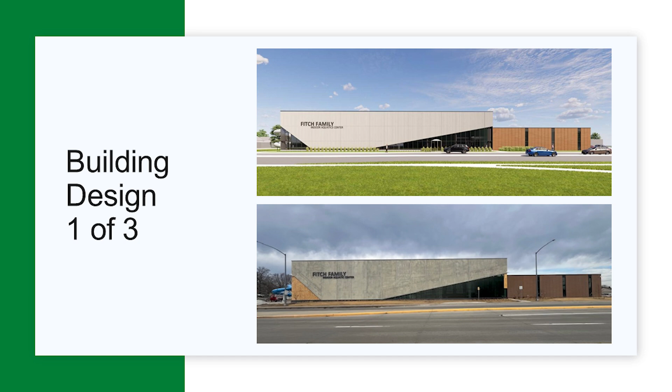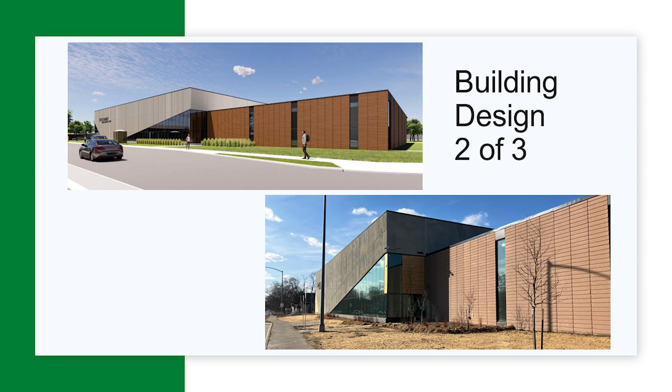This gives you a little picture, kind of a view from the southeast looking northwest. Again, very similar to what the rendering is up on top. And then this is from the north looking south from the parking lot, and that will be the main entrance - where you'll come in. Thank you to Fitch, the Fitch family, namesakes on the building for their generous donation.

We've had other big donors - Mary Greeley Medical Center, Fairway Meat and Grocery, a number of different people. Altogether, we brought in about $9 million in donations of the 27 that we're going to need. Thank you to Dan Culhane - if any of you know Dan, he went out and actually made a lot of those contacts with the business owners and individuals and groups to get those donations.

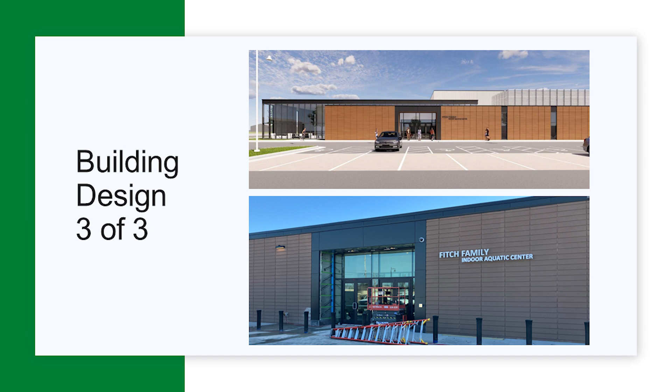There's one here, and there's one over here. This goes anywhere from about 42 inches, 3.5 feet of water, to 54 inches, 4.5 feet in the deep end. This pool will be 90-degree water temperature. So it could be used for a number of different things.

We might rent it for therapy. We'll have some aqua aerobics in there. We'll do our parent and child swim lessons - some of those will be in there, and that will be cordoned off. There is a wall here, and you'll see different pictures of that as well.

This here is our zero depth entry, play structure, Fairway Fun Zone, and then we have a current channel for water walking or just playing around. The water temperature in this is going to be 87 degrees. Over here we have the lap pool - again, we have a ramp coming in, different ladders. I should mention too on the zero depth entry, we have the lift and we also have a set of stairs right here.

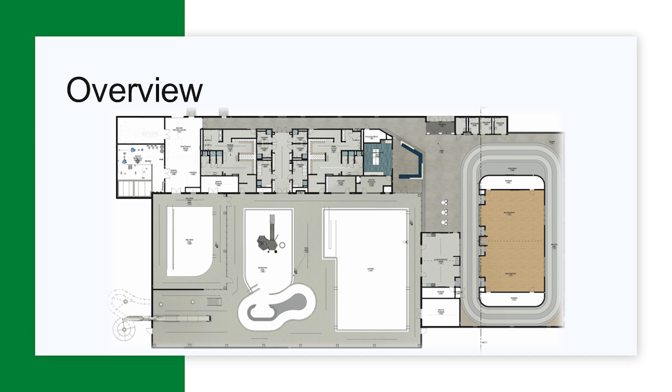But now what we'll do is take you through and show you there's still a lot of work that needs to be done, and you'll see this. A lot of these pictures were taken on Monday. So still working on, we're going to have polished concrete floors.

You can see the main entrance area, and then just to the right of the main entrance, we actually have 4 single-use restrooms as well, which will be handy. Anybody watching swim lessons or in fitness classes could use those.

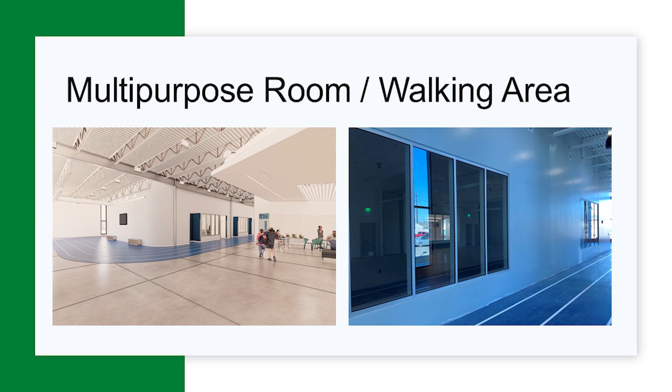So the multi-purpose room, walking area, you can see that's kind of looking from the lobby area when you come in the door. One of the things we did do is that space for the multi-purpose room, a lot of those walls are just steel studs and drywall. So in the future, since the city council does want to pursue a rec center, which would have some gyms and maybe some multi-purpose space, an elevated walking track, maybe a turf area, some other things, if we ever wanted to reconfigure this space, we could do it pretty easily.

And then this is looking back towards the entry area on the right side. Multi-purpose room on the left, party rooms on the left.

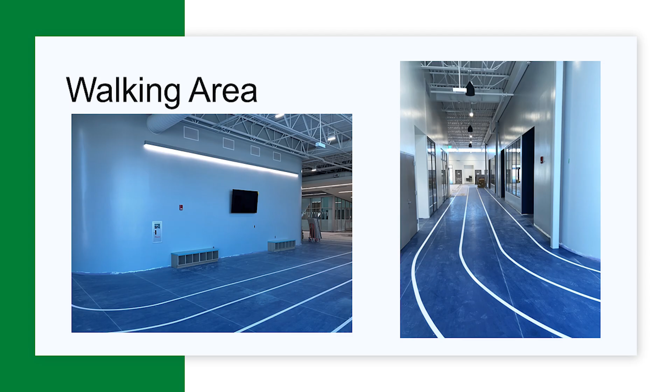What's the surface for the walking area? Is it concrete? No, it's a cushioned material, I always forget the name of it. You'll see this once we get pictures inside the multi-purpose room, the walking area and the floor in the multi-purpose room are the same, just different patterns. But it is cushiony, about maybe 1/4 inch, 3/8 of an inch thick. It's the same flooring that we have up in the multi-purpose room at the community center or in the hallway outside of that.

So again, that's the seating area I was just talking about. You can see the restrooms in the background.

We could have a public input meeting there. One of the things too in this room is we do still have a number of people that take fitness classes with us virtually, so we have the capability to stream live classes so people can still have that opportunity.

Then on the end of each of these rooms, on the north and the south, one of the things we're doing is we have these storage rooms. So a lot of our equipment, if not all of it, will be stored in these rooms. If you come in for a kettlebell class or something else, you'd go in one door of the storage room, walk by, grab your kettlebell, walk out the other door into the class. You'd have your class, and when you're done, go back the way you came. We'll have wipes there - you wipe down your kettlebell, put it back where you got it from, and walk out the door.

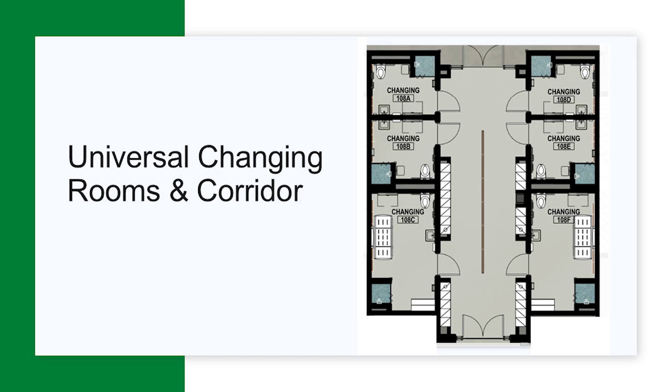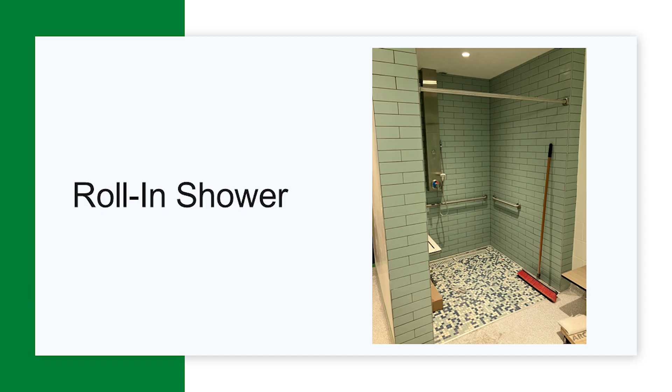And then this - just one of them, again the rendering, and then with the table, motorized - and then one of the pictures of the roll-in shower that we have.

So locker room overview - you can see the men's and women's locker rooms are identical, just flip-flopped. So you come in, you have lavatories, urinals, sinks, then your locker space. In the men's and women's locker rooms, the showers are all individual showers.

So there will be a door here, there'll be a shower curtain there. So when you go in, you can close the door. There is a seat to sit down, and there is also a seat in the shower itself that folds down if you needed that as well.

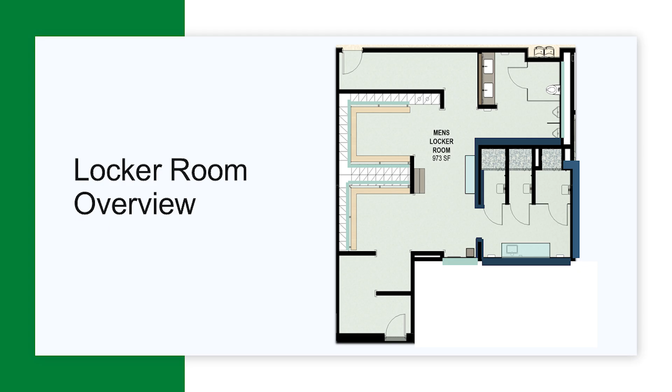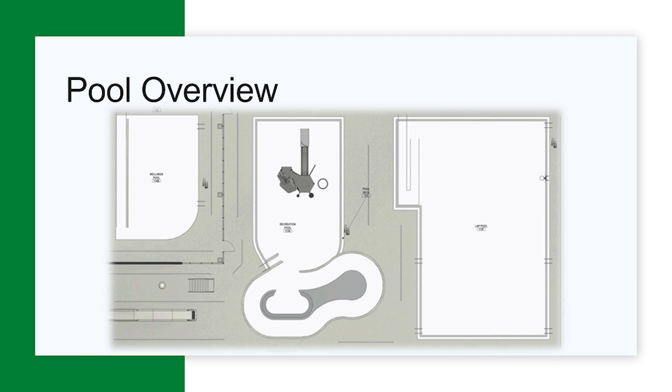Okay, that gives you a little idea of the locker rooms and things. And with the pool basins, we've kind of already talked about that. One thing I didn't mention was the slide, and we'll show you pictures of that as well.

Early on, we got questions about the universal change rooms being right here, and people asked, if the party rooms are over here, why didn't we put the rec pool over here and the lap pool over here? Our rationale was, with little ones—and I'm guessing a lot of you had little ones at one time, or grandkids—when you bring them out and don't have a hold of their arm, when these doors open up, what do they want to do? They want to run for the water, right? So we felt it was best to have zero depth entry, which starts at zero depth and then goes deeper. We felt it was better for them, if that happens, to run into this rather than run into 42 inches of water. That was our rationale for placing the basins the way we did.

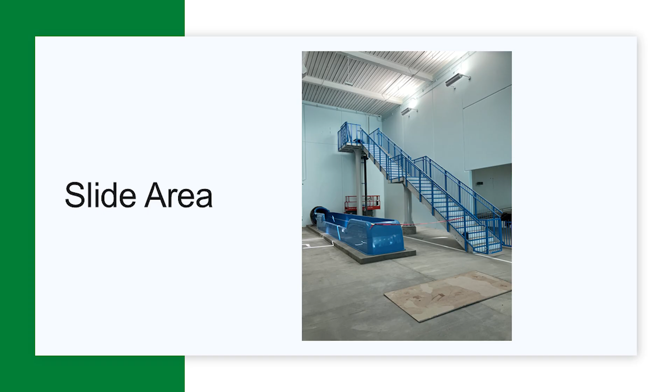Slide area—you can see the stairs kind of look like they go up to nowhere, but they do go up, and there's a little slot, a little hole that you climb into. It's a body slide. You go down, go outside, and then when you come back in, you come into the little run-out, which is on the left-hand side. So most of the activity is outside of the building.

Some people ask, well, why are you doing that? Isn't it going to get cold? This is Iowa, winters are cold, all that kind of stuff. But really, they have these all over the place, and I've been in them further north than here, up in Wisconsin, Minnesota, and other places. When you go down, you're not spending that much time, the water's warm—it's really not a big deal.

What we did do is we actually have almost like a tube within a tube. We have the tube that you're sliding down, then we have a layer of insulation, and then we have another tube outside of that. That's how this was constructed.

One of the areas outside, most of everything is done outside except for this area in the southwest corner. This will wind up being a detention basin for stormwater, so a lot of the water off of the building will go to this basin. This needs to get dug out, and then there will be water-type plantings, taller grasses, and things of that sort in there as well.

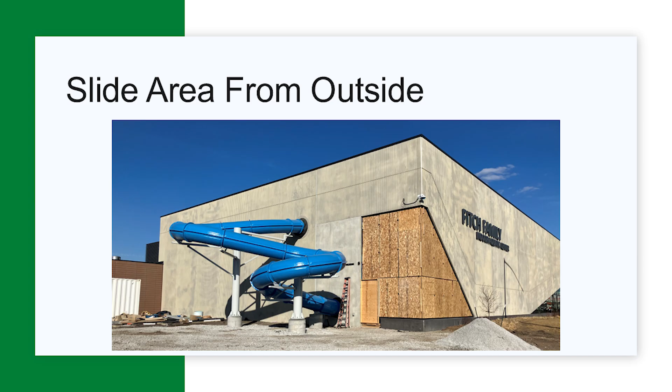I didn't mention this earlier when showing you pictures of the parking lot, but with the parking lot we are actually managing all the stormwater on site. We have permeable pavers, and water will go through those. We have underground water storage underneath the parking lot, and then eventually it goes to a basin in the northwest corner. That captures a lot of, if not all of, the parking lot water, and the building water, like I said, will be captured in this detention pond.

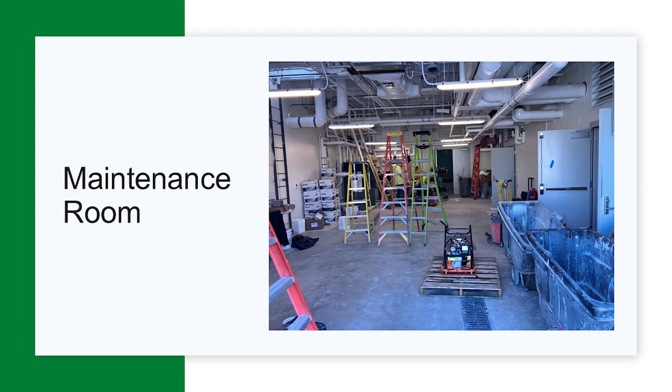The maintenance area, this is looking from the north side of the building, looking forward. The doors on the south end, or on the far end of this picture, actually lead into the wellness pool. On the right-hand side you have the electrical, and then the aquatics mechanical room as well, which has a lot of stuff jammed in there.

Beyond these panels are controlled VFDs, variable frequency drive motors. Beyond that is actually the pump pit, so all of our pumps are down there. To the left are surge tanks, which have heaters in them to heat the water. On the right side is all of our filters and other equipment.

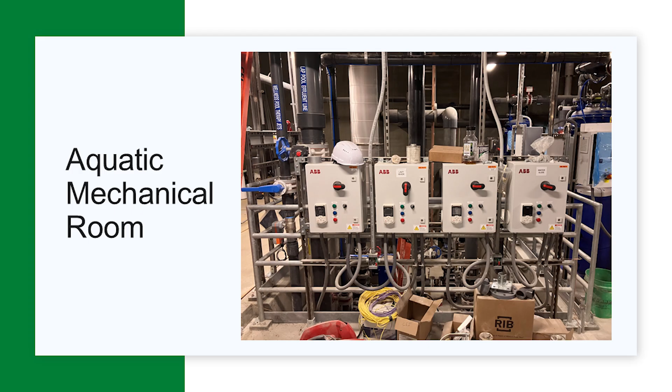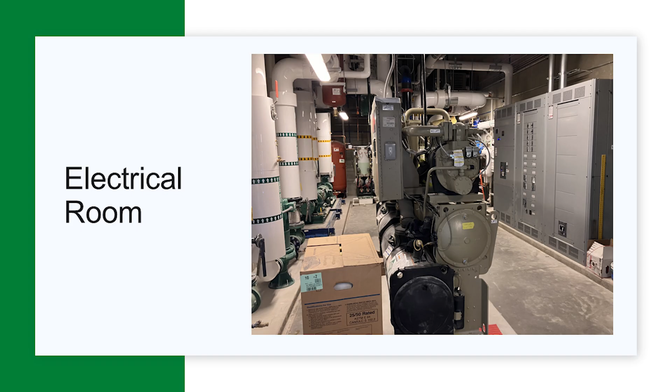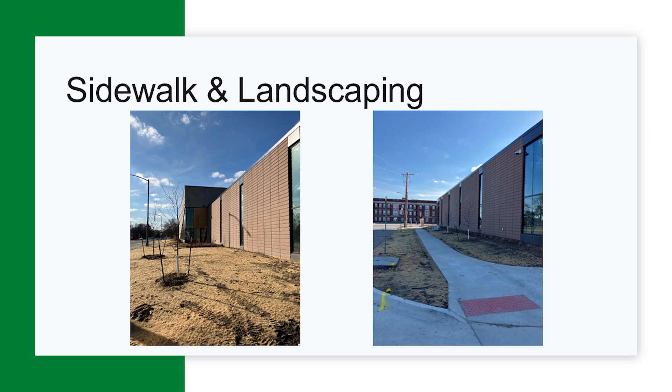So that was kind of an overview of all the pictures, what the facility looks like, and so on. As far as facility use, from Memorial Day to Labor Day, Furman Aquatic Center will be open for open swim and all those kinds of things.

Fitch will have some lap swimming in the morning, and we'll have swim lessons in the morning. Really the main use of Fitch in the summertime is going to be swim lessons, morning, and we'll also have some evening lessons. But we will have some lap swim time here at Fitch as well.

If Furman is closed — say the high is forecast to be 62 degrees, we're not going to open Furman — what we'll be able to do is have Fitch open for open swim instead. If we open Furman for the day and then have low attendance and have to close, we will not be opening Fitch, as logistically that would be very difficult to get people over. So that's what's going to happen, roughly, Memorial Day to Labor Day.

Labor Day to Memorial Day, Fitch will be open for lap swim, water walking, and open swim. We'll have different activities, aqua aerobics, fitness classes there — just a lot of different activities going on.